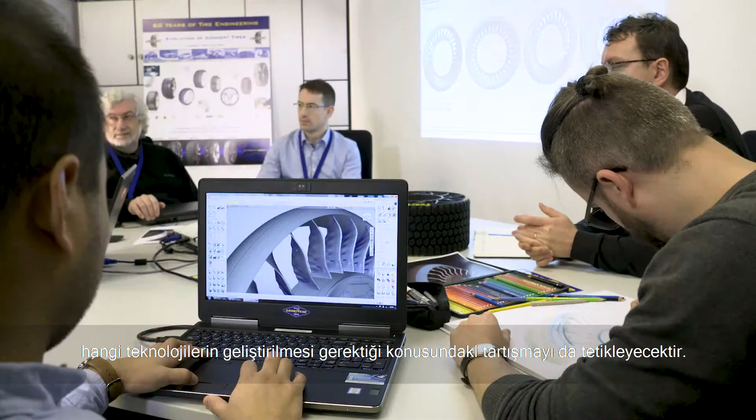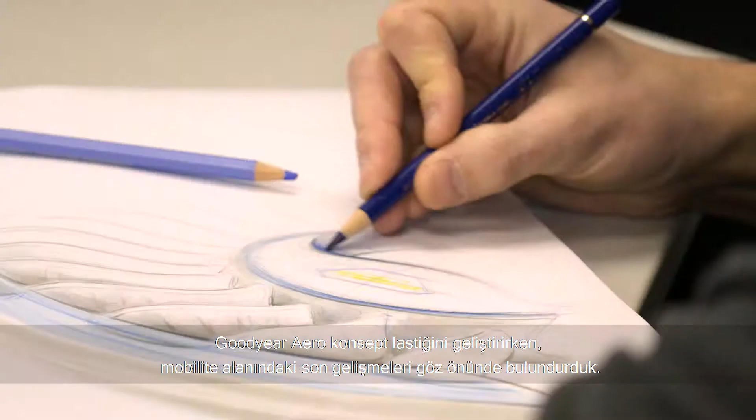To create the Goodyear Aero concept tires, we needed to bring different teams together and combine expertise of design and science. We brought together industrial designers from our design studio at the Goodyear Innovation Center in Luxembourg, together with our material scientists and modelers who create the simulations to provide the concept and the functionality of the Goodyear Aero concept tire. When developing the Goodyear Aero concept tire, we took into account the latest developments in the mobility space.

And one of the latest and biggest developments we saw is the rise of urban air mobility. As congestion is growing in the world, mobility companies are looking at new solutions, and for that, they're now looking into the sky for the answer. In the end, we hope that our concept tires will spark the debate about future mobility challenges and solutions.

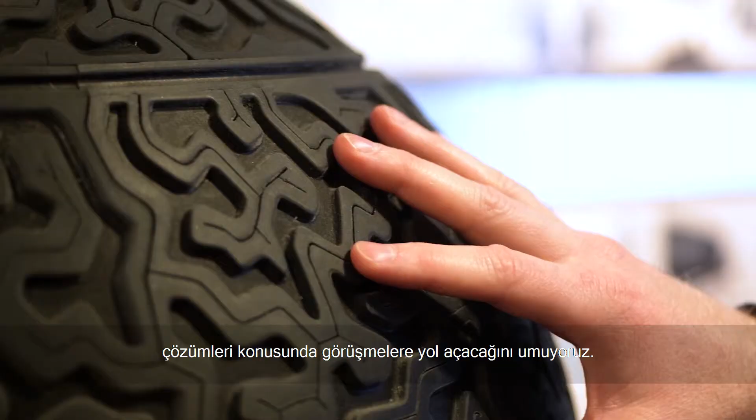Our concepts are very thought-provoking. We want to stretch the imagination, come up with things which are outside of the box. And we thought, really, how can we find a solution which would enable the vehicle to take off vertically, but also which could take off while driving in a movement.

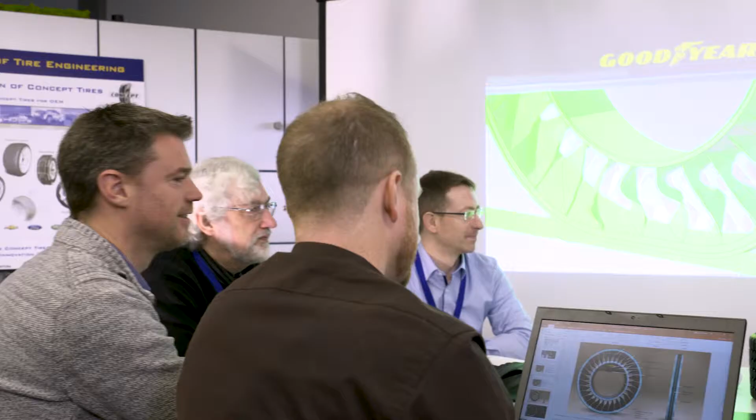The non-pneumatic structure, which is supporting the load of the vehicle, could also work as a rotor when it's tilting to a horizontal shape. So when they are tilting, the non-pneumatic structure becomes the fins of a rotor and will give the needed thrust to take off. What we really wanted to do is this seamless mobility, whether it's flying or driving, or from flying to driving.

As you easily understand, this is a challenge in a way that this tire is special because it needs to achieve two different functions. First one is a very classical one, which is about supporting the weight of a car when driving it on the road. That's very conventional for us. The second challenge obviously is to make it acting as a propeller and able to make a lightweight car flying in the air.

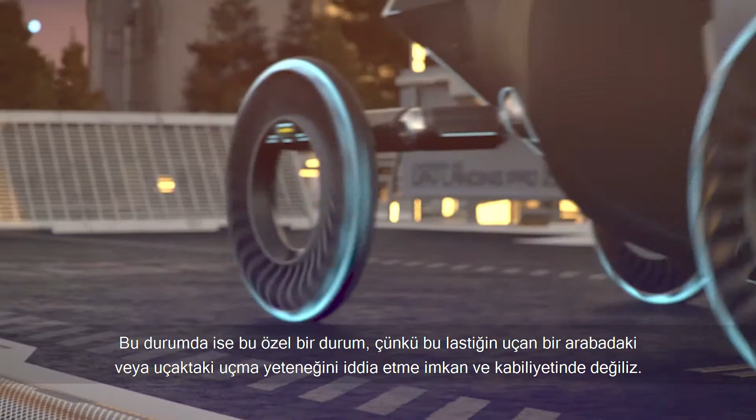For a normal tire, conventional tire, we have the ability to test it in the field for its performances. In this case, it's a bit special because we were not able to actually challenge the flying ability of this tire on a flying car or plane. So it means that everything has to go through simulations.

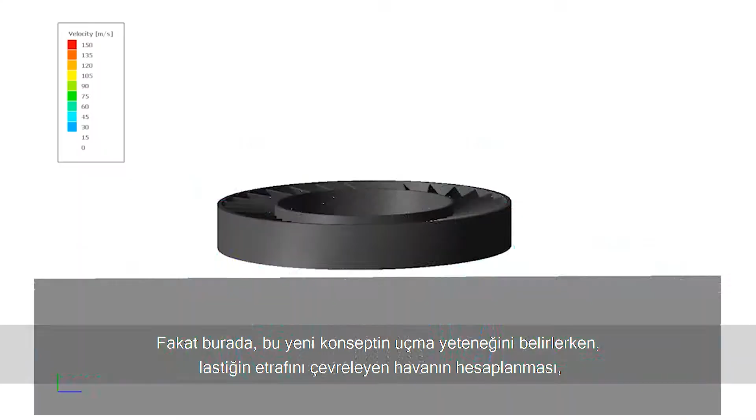In this case, with this new concept, which is definitely far away from a conventional tire, we use simulations to see how much we are capable of designing something which is out of our normal, usual design space. For classical performances like running resistance, wet grip, whatever, we use finite element analysis, which determines the structural behavior of the tire. But here, when determining the flying ability of this new concept, we rely on computational fluid dynamics to compute the surrounding air around this tire and compute the thrust and the lift from this new concept.

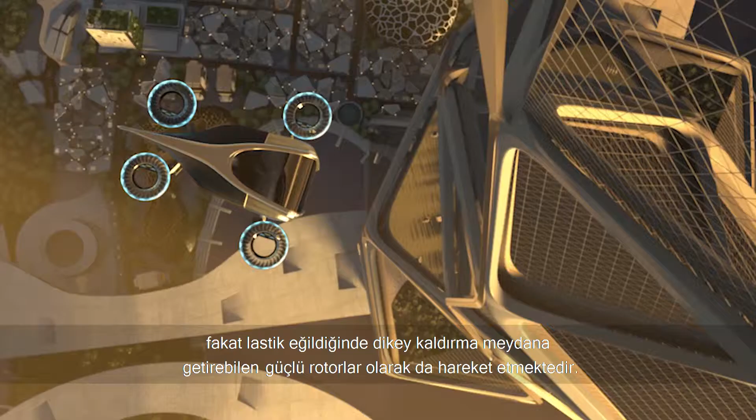The reason we choose a non-pneumatic structure is because it offers a solution which can be easily 3D printed and is both strong and lightweight. By using a non-pneumatic structure, we were also able to integrate the flying ability of the tire. The individual blades absorb shocks while driving on the road, but also act as robust rotors that are able to create vertical lift when the tire is tilted.

The most difficult part for me during the development process is that this tire is not a regular tire. It requires some out-of-the-box thinking, as we normally test regular road tires. You have to think about features that you normally don't have to take into account. For example, finding the right balance between strength and flexibility took some time and testing. We had to find the right flexibility and position of the individual blades.

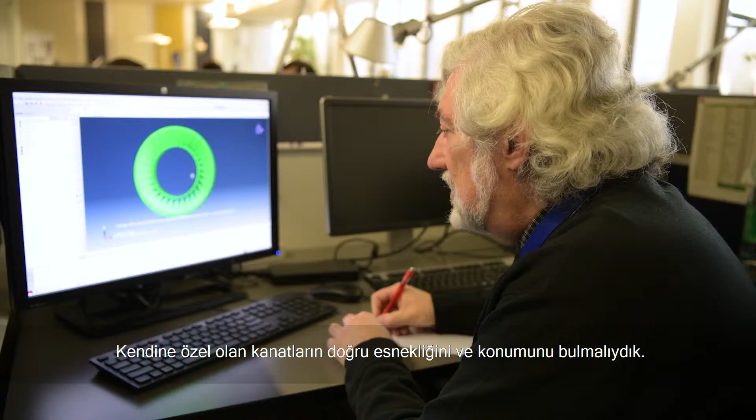After we found the right flexibility, the last thing we needed to check was the shape and position of the blades. Because they are flexible, the blade needs some room to bend. In our early test, it became clear that we cannot choose the form and position freely. If the blades touch each other, this might impact the structural integrity of the tire and its capability to lift the vehicle in the air. So we had to position the blades in such a way they have room to bend and not touch each other.

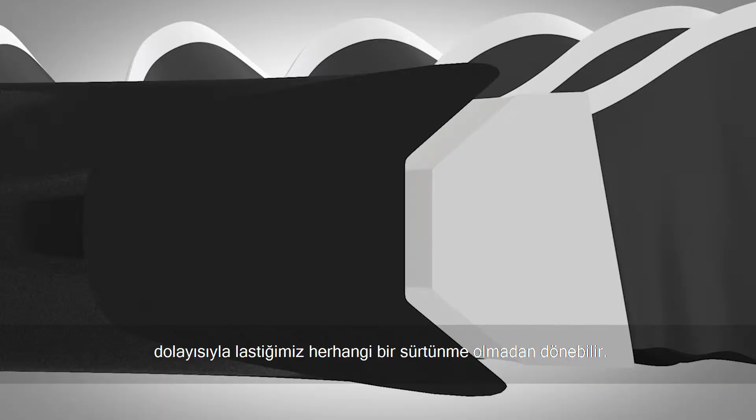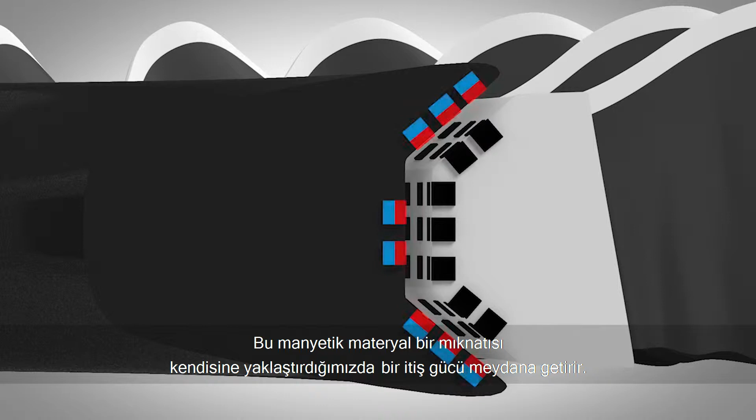Magnetic propulsion is basically taking advantage of the properties of magnets. Magnetism gives us the possibility to make a frictionless bearing so that our tire can turn around without any friction. In the rotating part of the tire, we have a special kind of magnetic material which creates an opposing force if we bring a magnet into its vicinity.

Since we have a full ring of this material, if we bring it into another ring of permanent magnets, we get really a magnetic bed with a magnetic gap in between. So that gives us our bearing. Now, we also want to have not only this frictionless turning, but we need to initiate the turning itself. You need to get force onto the tire.

This we realize with electromagnetic fields. So we have like a big spool, we put an electric current inside. This generates again a magnetic field. This magnetic field can interact with the special magnetic material on our turning part of the tire, and this will give us a force which makes the tire turn.